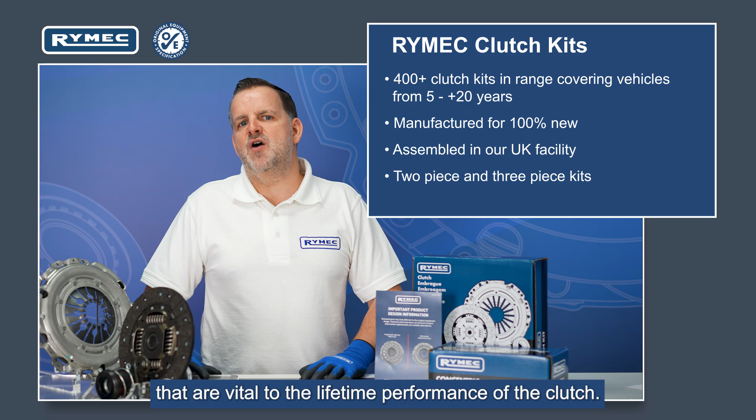I want to give you a few examples of what we do to ensure our clutches perform to OE specifications. If we take the cover assembly, it is basically a pressure plate and a diaphragm spring that clamps or releases the driven plate from the flywheel. In essence, this temporarily disconnects the transmission from the engine, allowing a gear change to be performed by the driver.

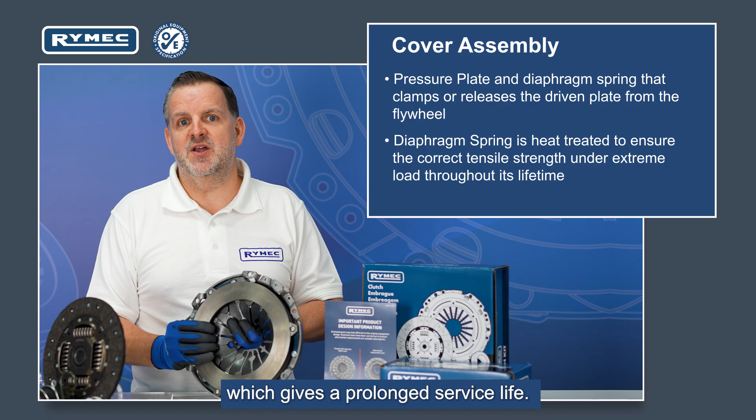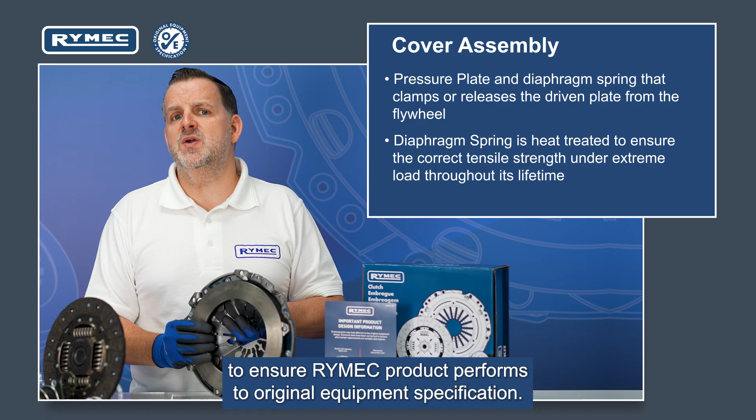The diaphragm spring is heat treated to ensure the correct tensile strength under extreme load throughout its lifetime. The pressure plate is made from cast iron for its good thermal properties, which gives it a prolonged service life. The key performance characteristics of the cover assembly are mapped against the OE performance characteristics to ensure RYMEC product performs to original equipment specification. Now let's look at the driven plate.

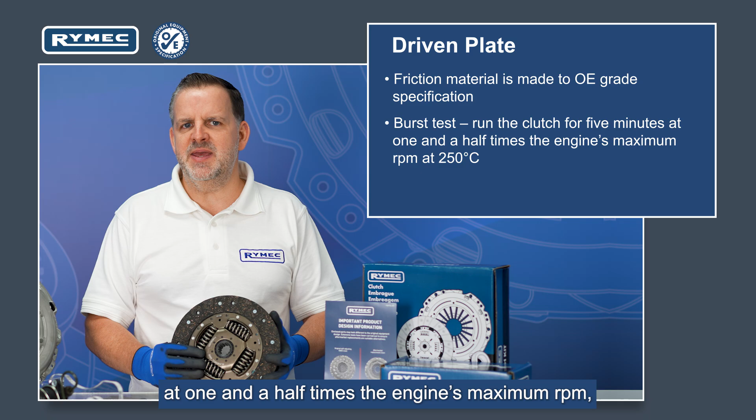Firstly, the friction material is made to OE grade specification to ensure matching OE performance. We carry out a burst test, which is a test where we run the clutch for 5 minutes at 1.5 times the engine's maximum RPM at 250 degrees Celsius. The clutch is then tested to ensure it operates under normal tolerance levels against all our other tests and matches the OE performance and characteristics.

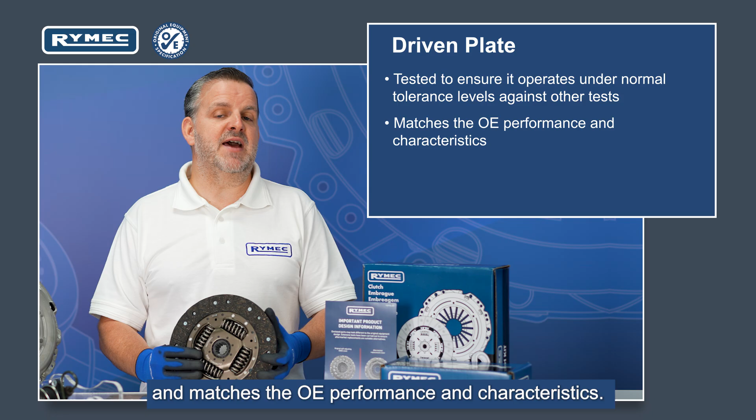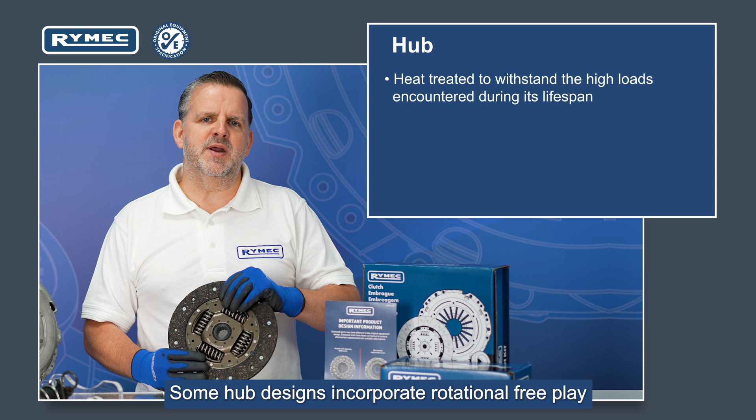Another important element is the hub. This is heat treated to withstand the high loads encountered during its lifespan. Some hub designs incorporate rotational free play, which is called a floating hub, and is specifically designed like this and is not a product or manufacturing defect.

I would also like to mention the design difference between RYMEC and other clutch manufacturers. They might not always look exactly the same. The most obvious differences might be in the cover pressing design, where different methods of manufacture have been used. Despite these differences, you can be confident we have specified the right part for the right application, and where the differences are obvious, we include a technical bulletin within the box, reassuring your customer that it is correct for application.

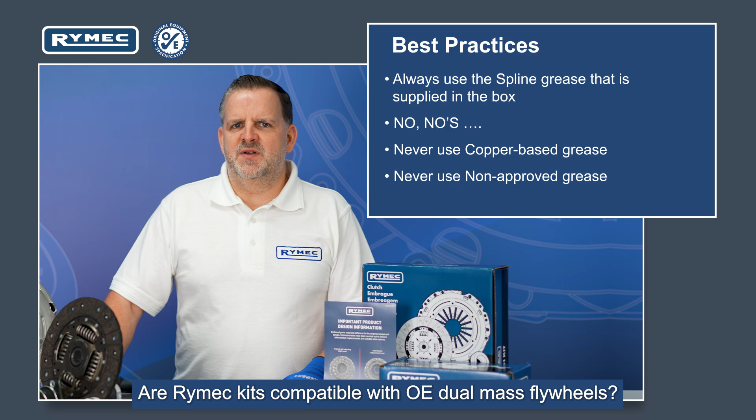Are RYMEC kits compatible with OE dual mass flywheels? Yes, they are. They are always designed and developed to work with the OE flywheel, whether it's a solid or dual mass flywheel. We even do DMF kits, but we will take you through that in another module.

I also want to remind you that all our clutch kits come with spline grease. The installer should use this, as we have some cases where copper-based or another non-approved grease has been used, which will cause premature failure of the clutch.

On a final note, don't forget there is a large range of RYMEC clutch kits for light commercial vehicles, as well as passenger cars. In fact, several large commercial fleets choose RYMEC for replacement in their fleets as a cost-effective option.